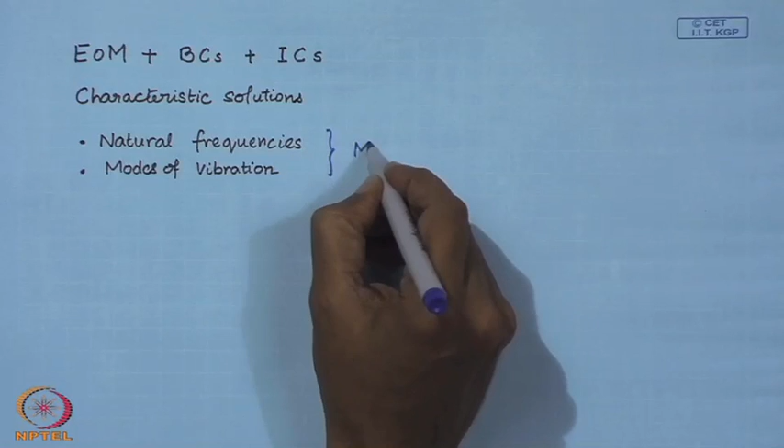So when we do modal analysis, what we are doing is actually searching for solutions of very special form. So if you recall the equation of motion of a string, suppose it is a fixed string of length L. So we have the equation of motion and the boundary conditions.

Now our field variable is this w(x,t). Now this is a general function of the spatial coordinate x and the temporal coordinate t.

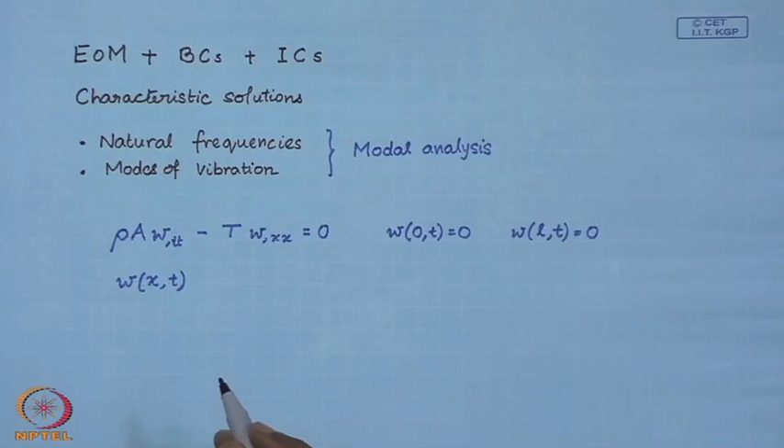Now, when we do modal analysis, we are searching for solutions which are of a very special form, which look like this, where this i is the square root of -1, omega is known as the circular frequency, and W is the amplitude function.

So we are searching for solutions of this very special structure, in which in a certain way the spatial function and the temporal function are somewhat separated. Now they look separated, but remember that we have introduced...

So now this solution is in the complex form. So this W may in general be a complex function. In that case, the solution is not strictly separated in space and time, but we will encounter such solutions later in this course. So for the time being, we introduce this complex solution structure, and we say that the actual solution, because our equation and the boundary conditions are all real...

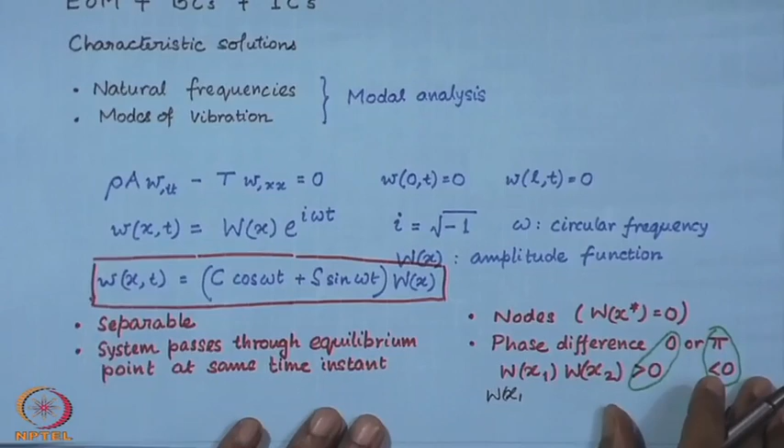There is another interesting property of the solution, that is the ratio of amplitudes at x1 and x2 that is independent of time. That is to say, this ratio. So, essentially this is independent of time, as we can see.

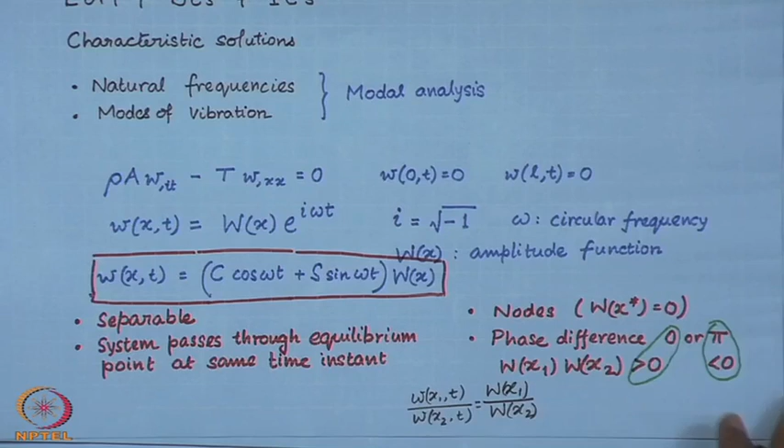So, we will start with this structure of the solution and see or try to find out the characteristic motion of the system. So, to do this we will start with the example of the uniform taut string.

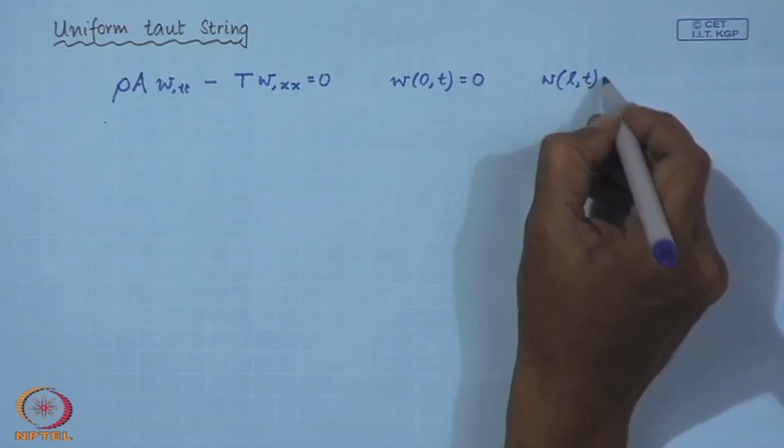So, the equation of motion and the boundary conditions look like this.

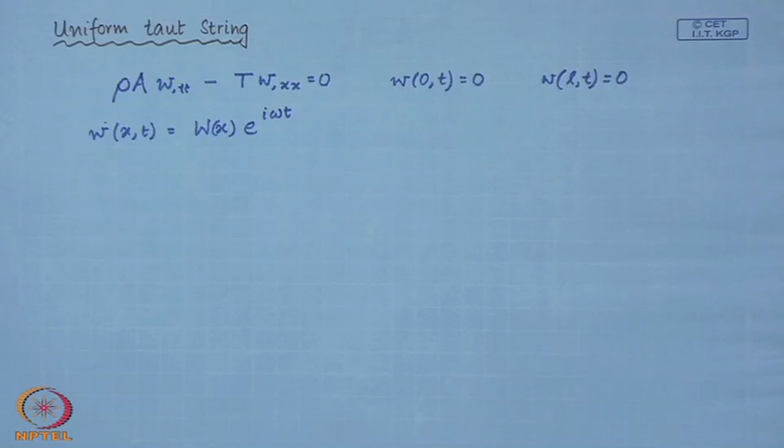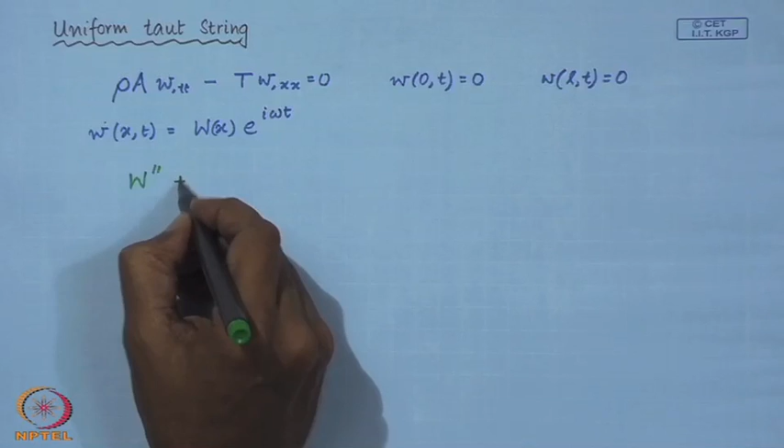Now, we are going to substitute this solution structure, and if you do that and with a little rearrangement you can easily see the equation reduces to this, because exponential i omega t will never be 0 for any time.

So, the remaining part, the coefficient of exponential i omega t, which is this, must be 0, and along with this we must have the conditions at x equal to 0 and x equal to L.

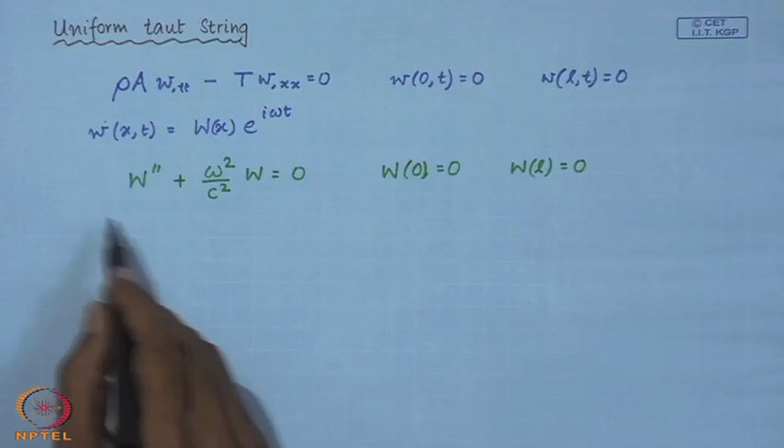Now, this differential equation is very familiar and the solution can be written directly. Now, this is the general form of solution of this differential equation. Along with this, now we have these boundary conditions at x equal to 0 and x equal to L.

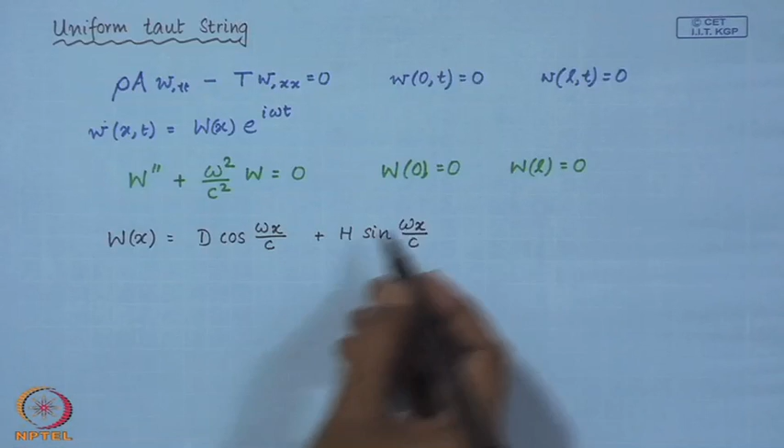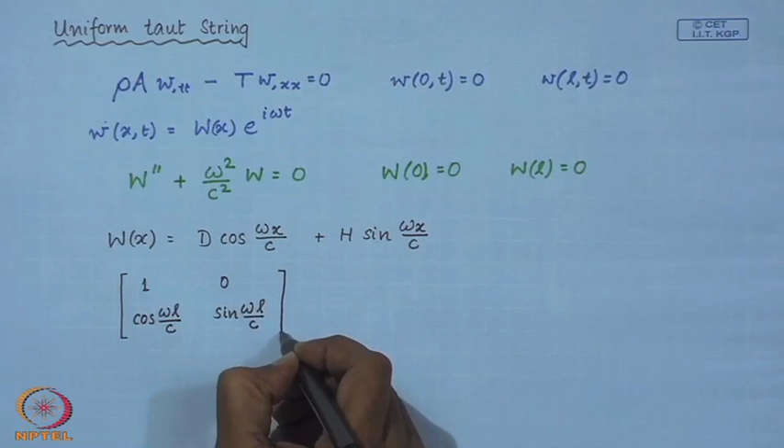So, we will substitute these in the boundary, this solution form in the boundary conditions, and we can rewrite the boundary conditions in this form.

Now, if you want to have non-trivial solutions of D and H, which is what we desire, then the determinant of this matrix must vanish. So, that implies

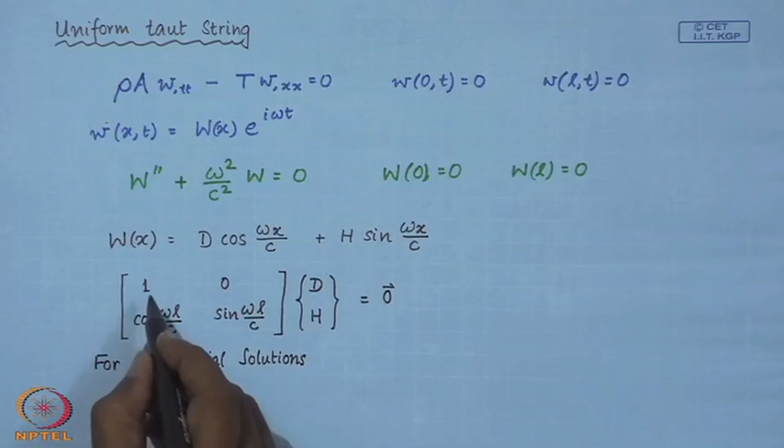So, determinant of this is nothing but sin omega L over C, and that must be 0.

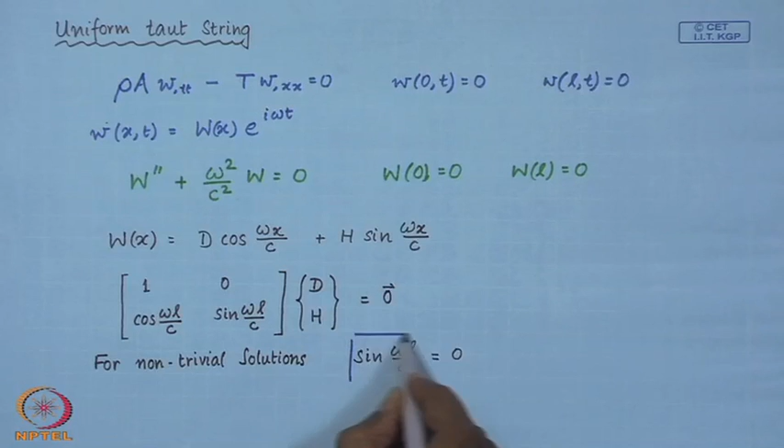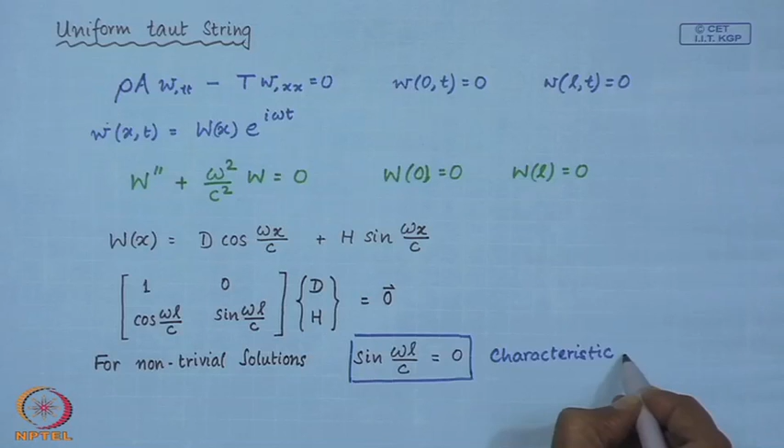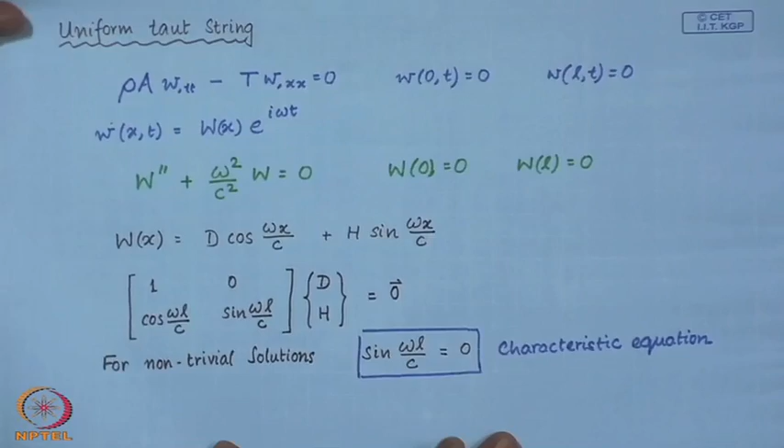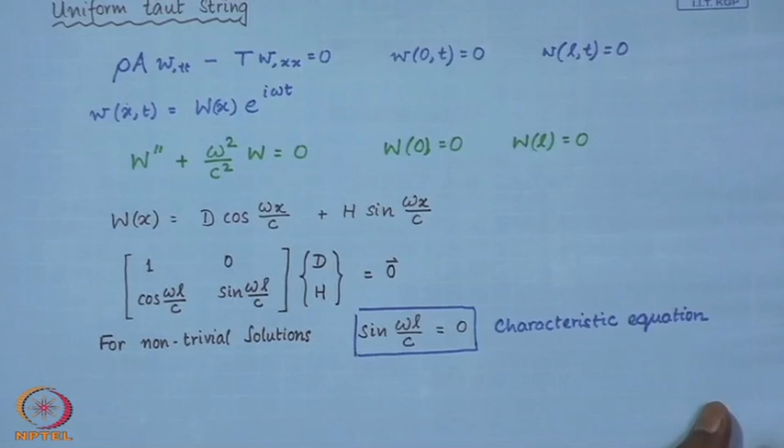This equation is known as the characteristic equation. Because it yields, this condition yields certain characteristic solutions or properties of the system, and they are the circular frequencies, which are also known as the natural frequencies, circular natural frequencies of the system.

So, from this condition we can immediately write that omega, now there are discrete solutions of this characteristic equations, but there are infinitely many of them. So, there are countably infinite many points at which this will be satisfied for special values of omega.

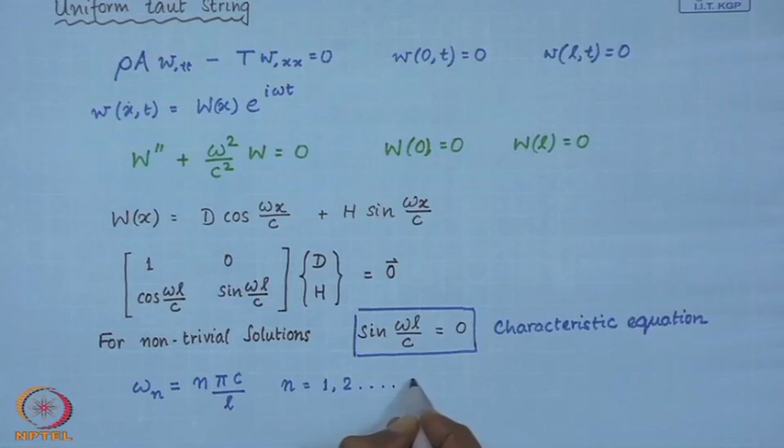So, we will put an index n and write this as, where n, this index n goes from 1 to infinity. So, there are countably infinitely many natural frequencies of a string, of a fixed string, which are given by these values.

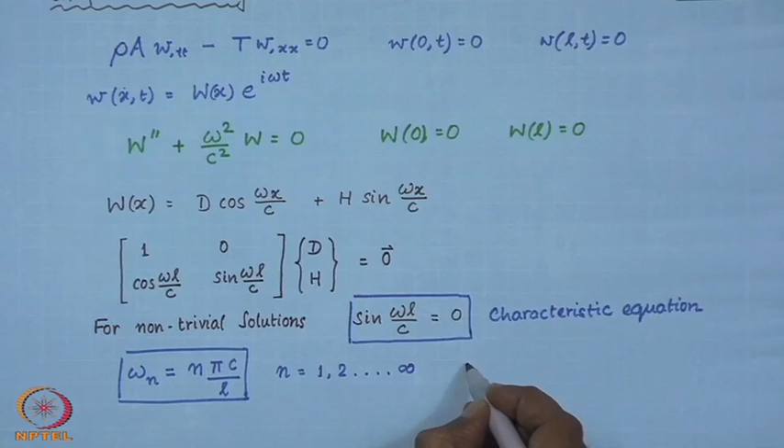They are called the circular natural frequency, also sometimes known as the characteristic frequencies.

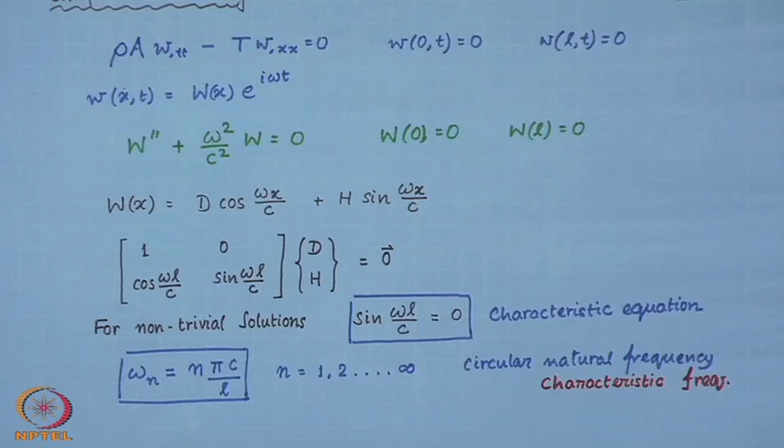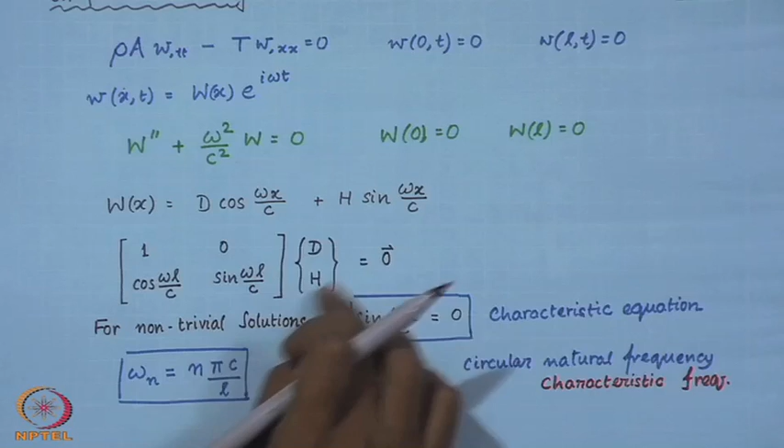Of the system. Now, once we find these special values of omega in this matrix for which we have non-trivial solutions, we can find those non-trivial solutions by finding the corresponding D and H values, which look like

So, if you substitute these values of omega n into the boundary conditions, it can be easily seen that the solutions are, or can be written in this form.

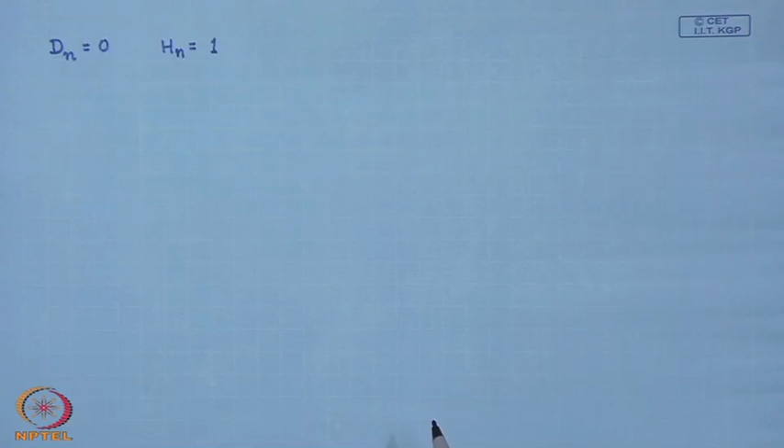So, anything proportional to this will be a solution, where n goes from... So, corresponding to each circular natural frequency, you have this vector which gives you the actual solution, which is obtained as

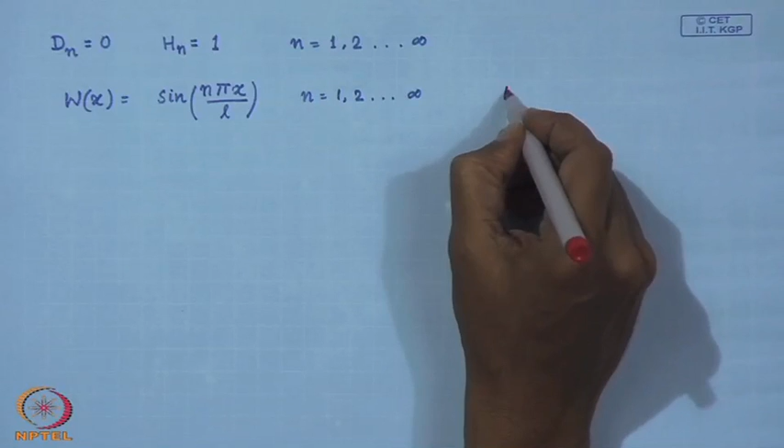These are called the modes of vibration, or they are actually the eigenfunctions, and again they correspond to the natural frequencies of the system. So, for every natural frequency there is an eigenfunction which defines or describes a mode of vibration.

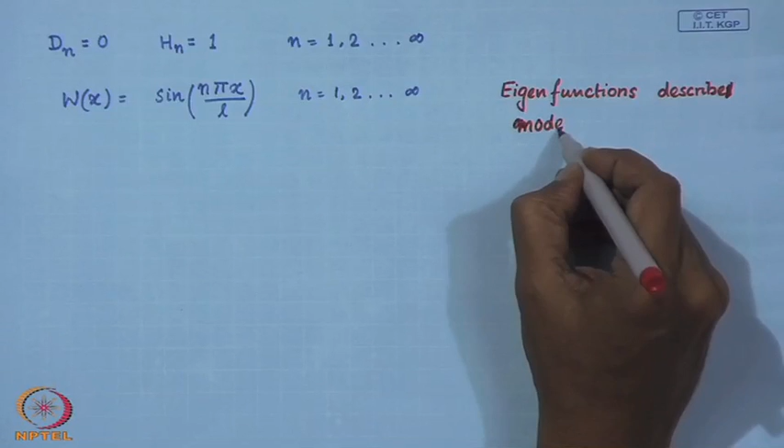So, the total solution now looks like this, and everywhere we have this index n. So, here also I must have this index n.

So, this is the solution for each n. I can have a solution, and since our system is linear, a superposition or a summation of this solution is also a solution. So, I can finally sum all these solutions and construct the most general solution of a vibrating string with fixed support.

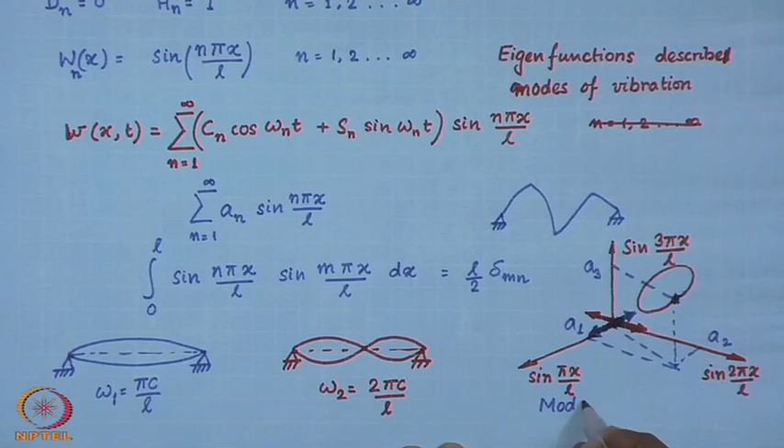This infinite dimensional space is sometimes called the modal space, or sometimes also called the configuration space of the string.

In this space, the configuration of a string at any time instant is represented by a point, and when it moves from one configuration to the other, it is nothing but the motion of this point in this space. We have seen that the elemental motion, or motion along these axes, represents the modal solution.

Now, I am going to demonstrate these solutions with a small experiment, but before that let me point out that as you can see in this solution there is no node within the domain of the string, whereas here there is one node.

Where the string remains fixed, this point is not moving out from the equilibrium position, whereas other points are vibrating. Here all points are vibrating in the same phase. So the string essentially moves through intermediate configurations like this, and then comes back and passes through the equilibrium point. At the equilibrium point the string becomes straight, then starts moving down and reaches this extreme, and repeats, starting afresh.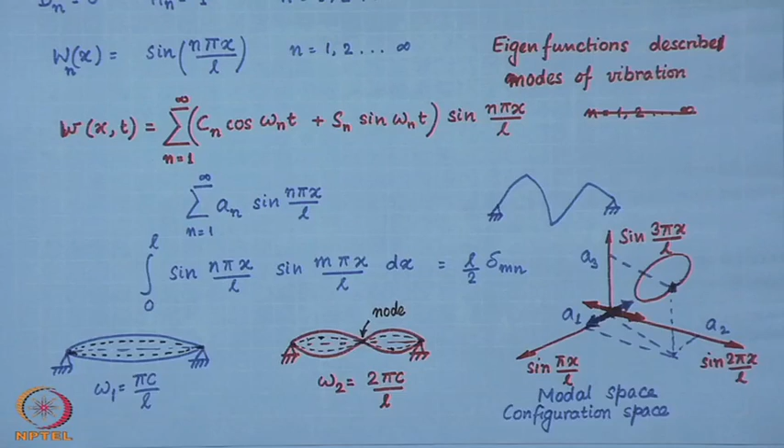So now I will demonstrate these modes using a small experiment. Here I have a string which I have made taut by pulling, and here there is an exciter, which is nothing but a simple electric shaver.

Now, as I pluck the string, you see the motion ceases after some time. This is expected since all real systems have internal damping, but in our model that we have considered till now we do not have damping. So to cancel the effect of damping I must have an exciter which pumps the same amount of energy that is being dissipated due to the internal damping in the string.

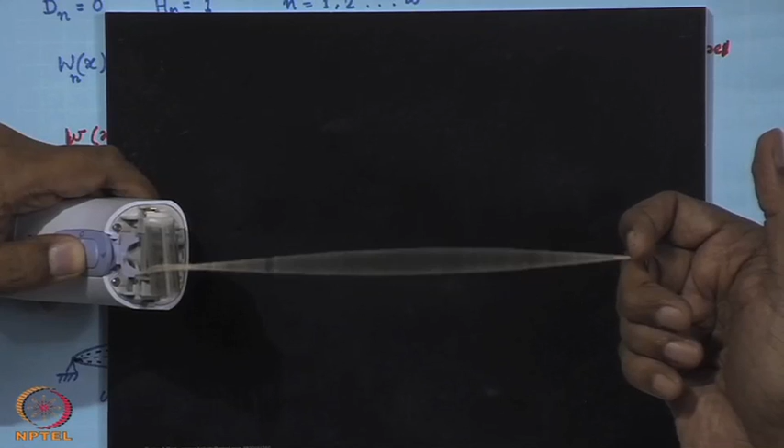Now let us see. So this is the first mode of vibration of the string. This is how it looks like when it is vibrating in the first mode.

Now let me try the second mode. So this is the second mode of vibration of the string. I may also try the third mode, which may not be visible very clearly because the amplitudes are so small. But the second mode is quite clear, and the first mode as well.

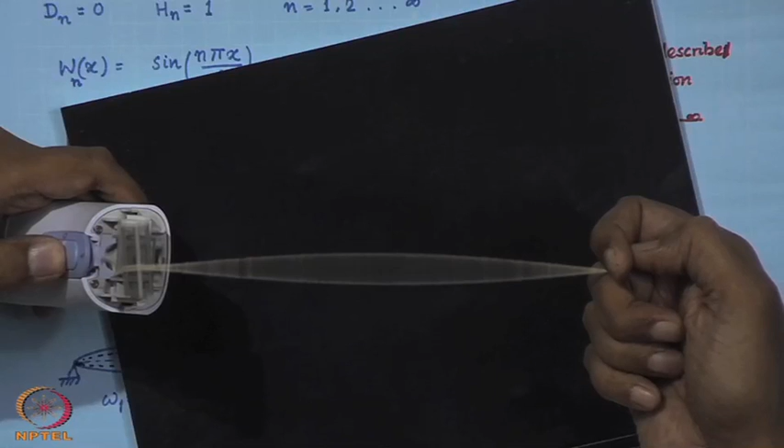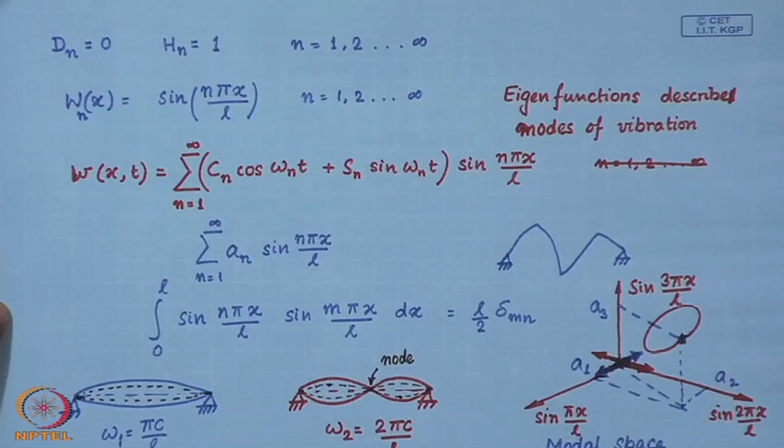So this is what we have observed. We have seen the first two modes quite clearly; the third mode, because the amplitudes are so small, has been less visible, and so on for the higher modes.

But whenever I pluck a string, I actually excite a number of these modes. So the motion of the string, if I pluck it at an arbitrary point, I am actually exciting a number of these modes. So the solution is more complicated, but I can, by special means, excite only these individual modes, and we have seen that in a demonstration.

The next example that we are going to look at is that of a uniform hanging chain. We have derived the equation of motion of a uniform hanging chain previously, and it looks like this.

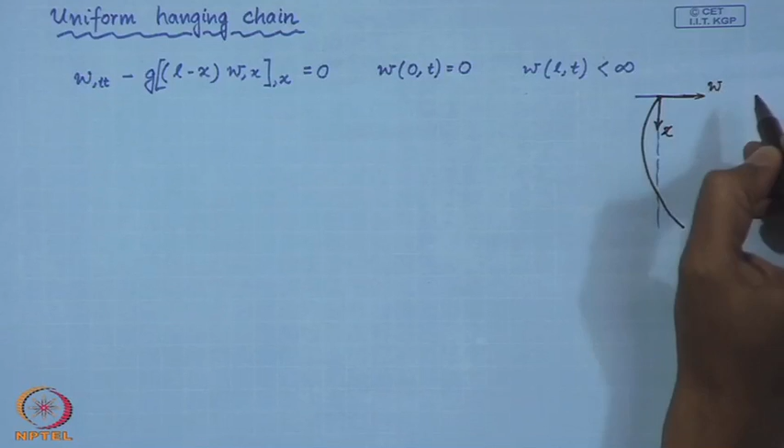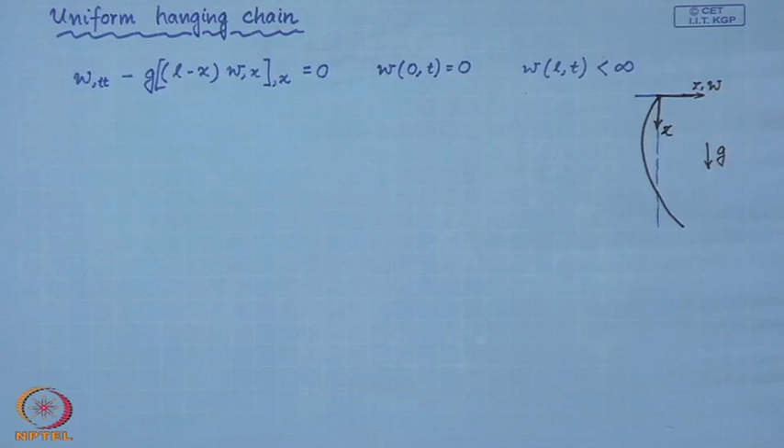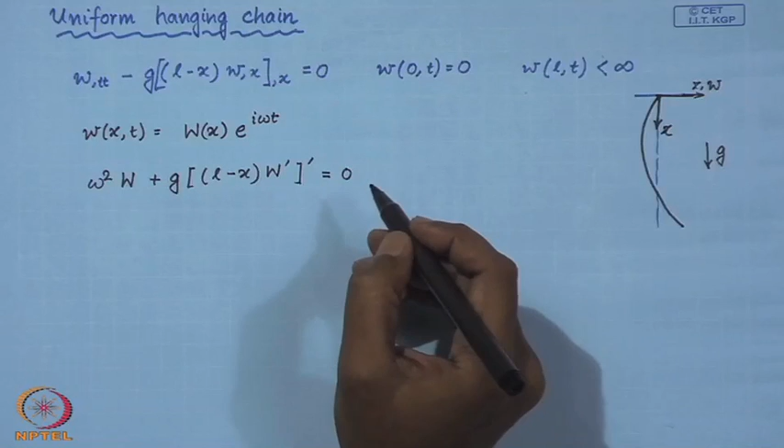Now, once again we are going to attempt a solution with this structure, and we obtain this, with the boundary conditions.

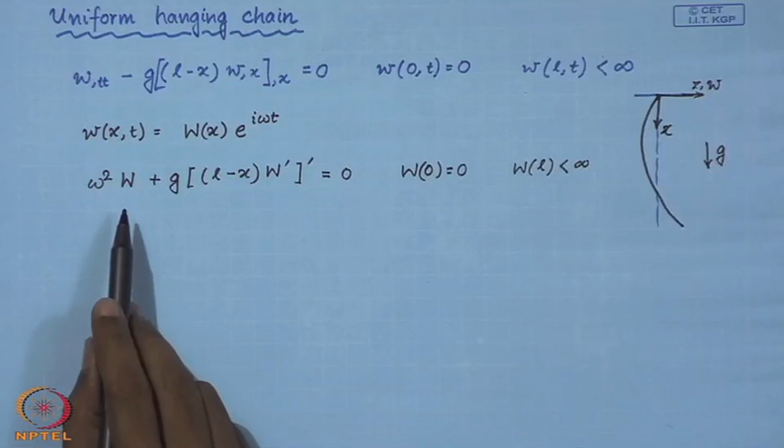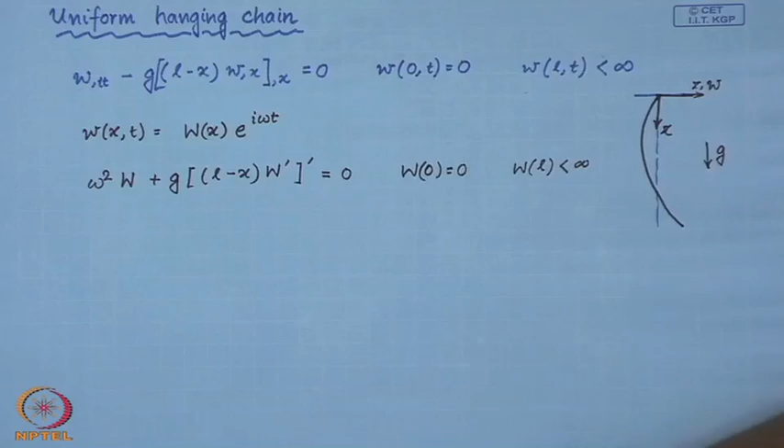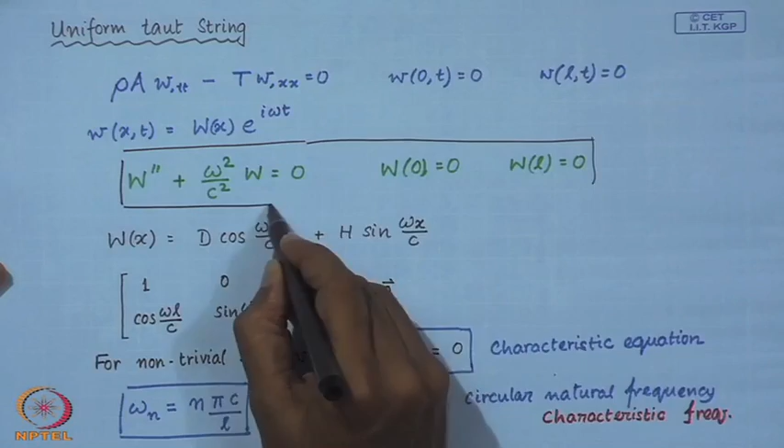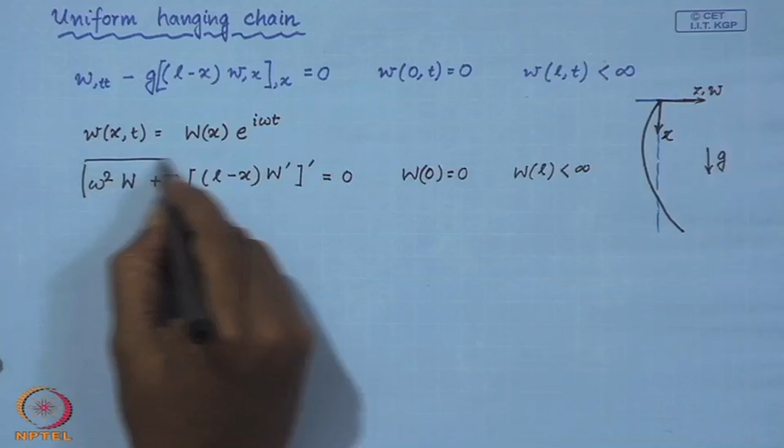Now, in the case of a uniform taut string, we obtained the equation previously. After substituting the solution structure, we obtained a differential equation and boundary conditions. Here again we have obtained a differential equation and boundary conditions.

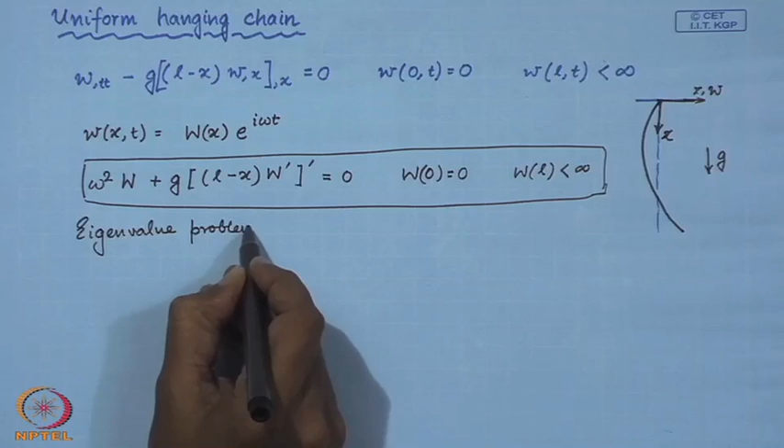This problem is known as the eigenvalue problem. So in the case of a string, this was our eigenvalue problem.

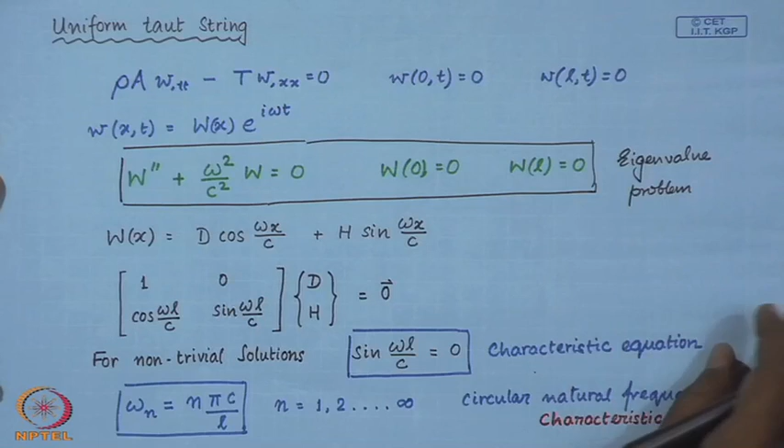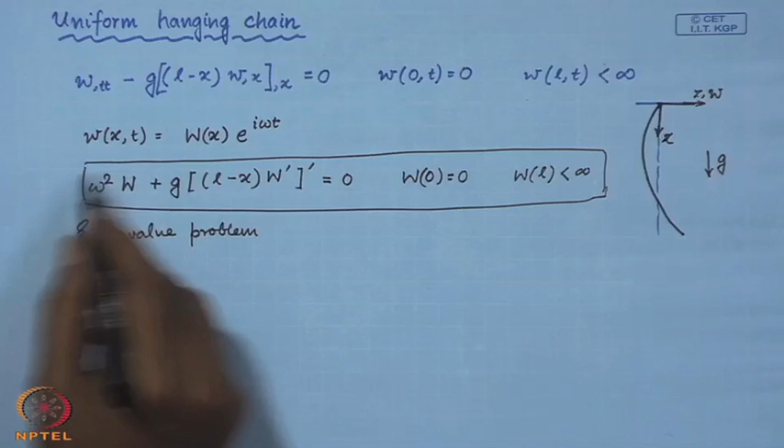Now, this structure of equation looks tantalizingly familiar, because we have studied equations of this structure when we discussed Sturm-Liouville problems in mathematics.

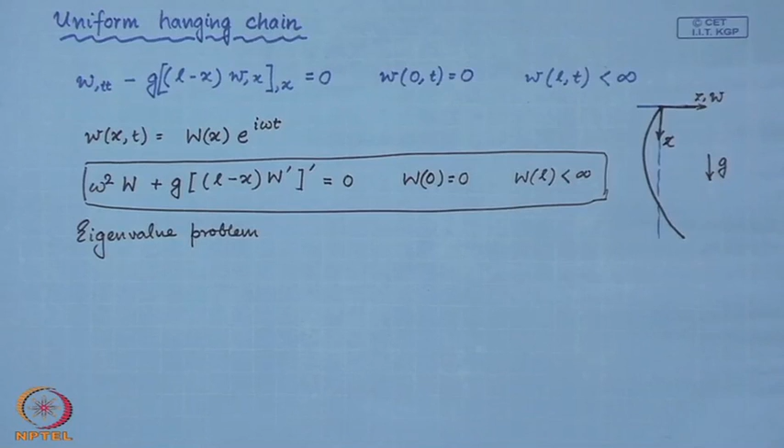Now, to convert this, because this particular structure is very special, we can convert this into a more familiar form by using transformation of the independent variable x. So, let us consider a variable s which is a function of x.

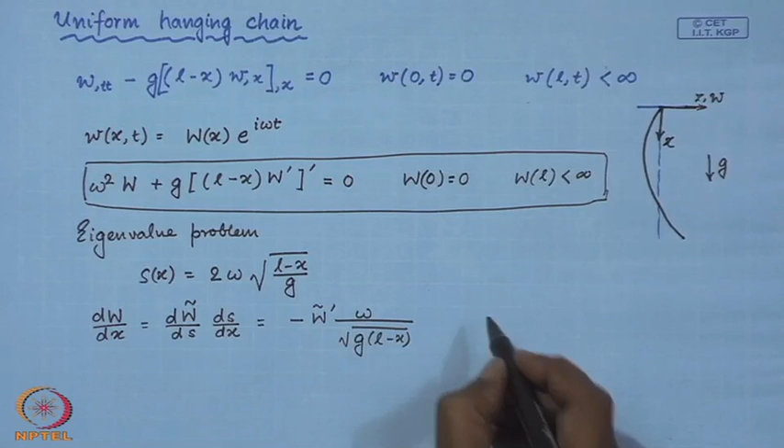If you use this new variable s, then you can replace, which you can check very easily, where w tilde is a function of this new variable s, and similarly you can work out the higher derivative.

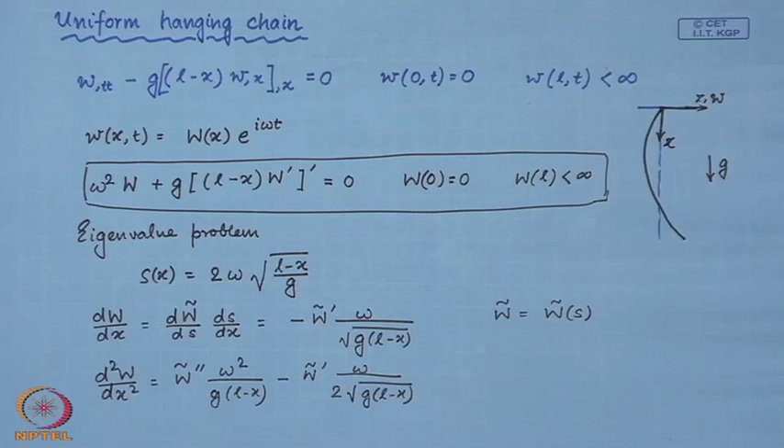Now, having done this, if you substitute back in the equation and convert this equation in terms of s, then what you obtain is, with the boundary conditions, this can be checked very easily.

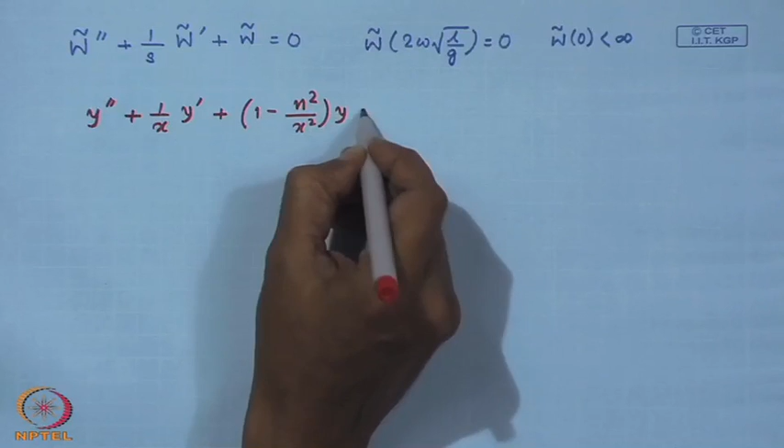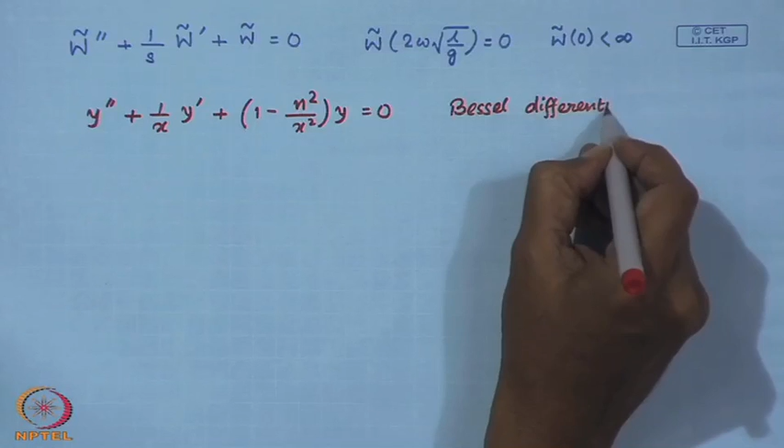Now, this is a very familiar equation which is the Bessel differential equation. So, this equation is the Bessel differential equation, and if in this equation you put n as 0, then it reduces to this differential equation.

And the solution of the Bessel differential equation with n equal to 0, which is the solution for our w tilde, where j 0 and y 0 are known as the 0th order Bessel function of the first and second kinds respectively.

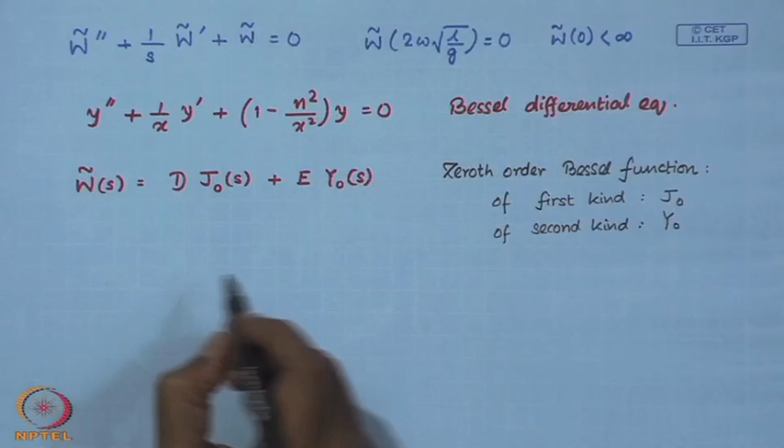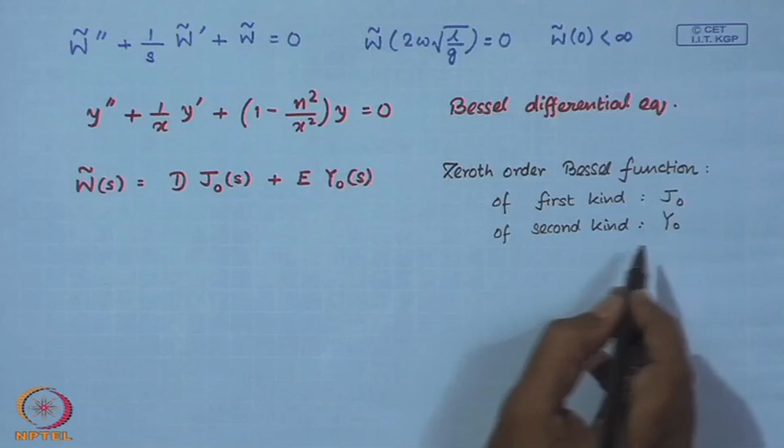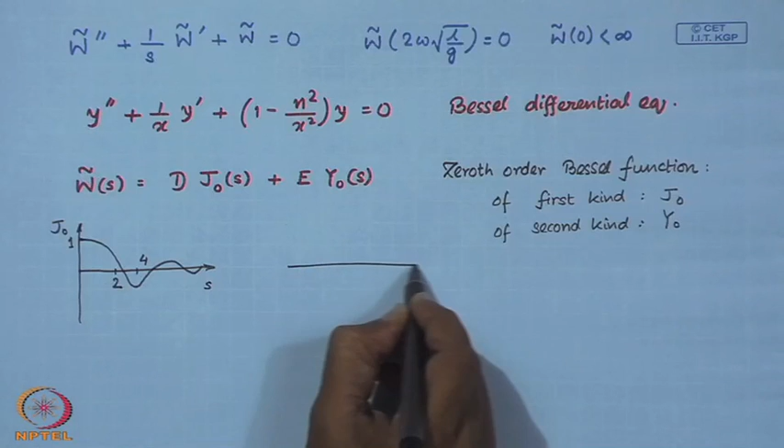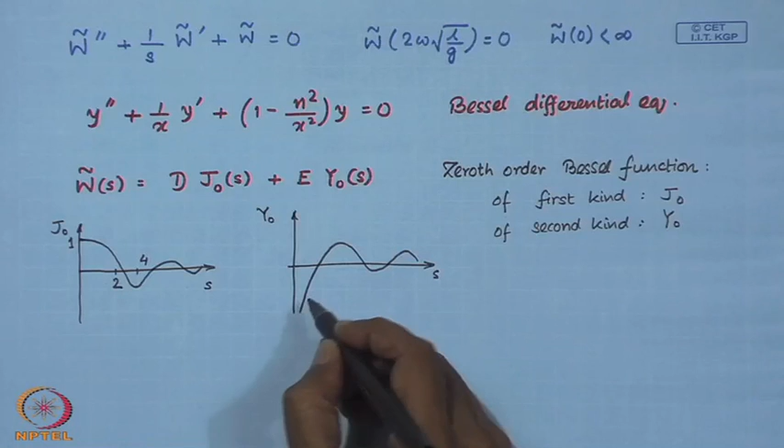Now, if you look at these Bessel's functions of 0th order, you will find that the second kind has a logarithmic singularity at s equal to 0. So, if I make an approximate plot of j 0, at s equal to 0, y is minus infinity.

So, this will violate this boundary condition, which is the boundary condition at the free end. So, finiteness of the solution at the free end forces us to select E as 0. So, E must be 0.

Which can be written. So I can write this down in terms of my original variable x, but before I do that, let me look at the boundary condition. So we know that this implies.

This must be 0. Now, you can see from this figure there are discrete points, but infinitely many, at which this function j 0 is 0. So these countably infinitely many solutions of this will give us the natural frequency, circular natural frequency of the system.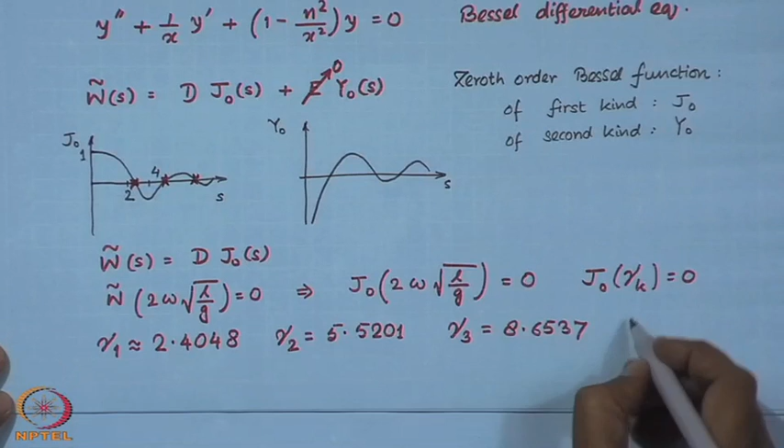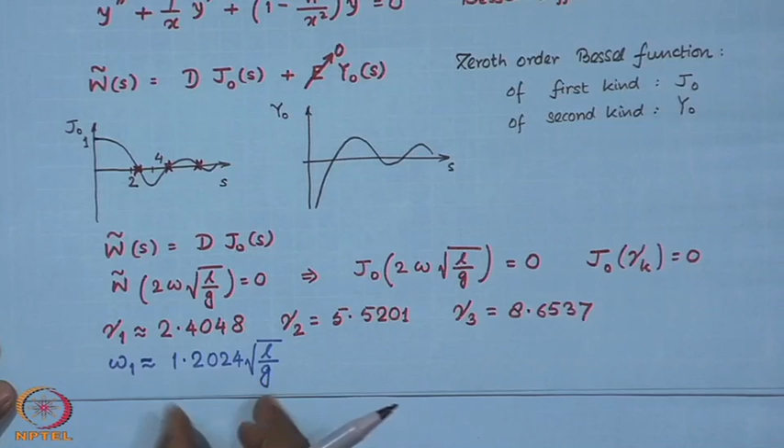And from these values of gamma k, you can find out, for example, you can easily write omega 1 as 1.2024 under root L over G. So you can see that compared to a mathematical pendulum, this is 1.2 times higher.

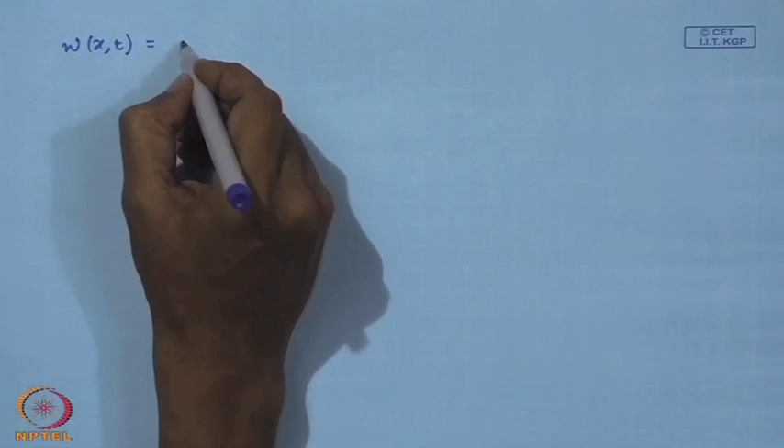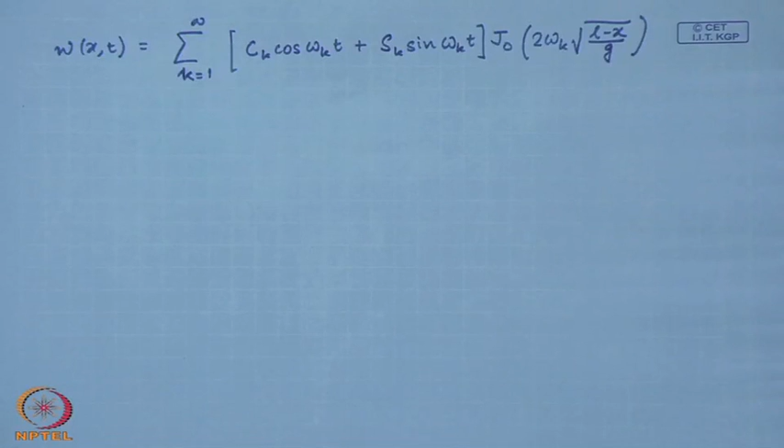Now, finally, once you have this, you can write the general solution once again using superposition. Where, so these represent the modes, these are the eigenfunctions, and the modes of vibration of a uniform hanging string are defined by these eigenfunctions.

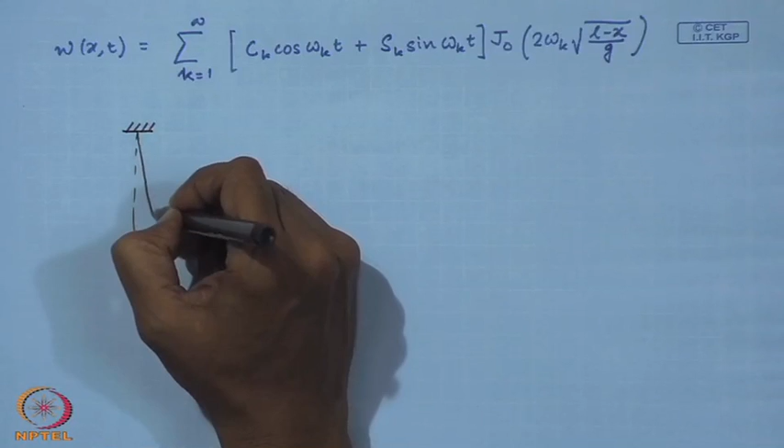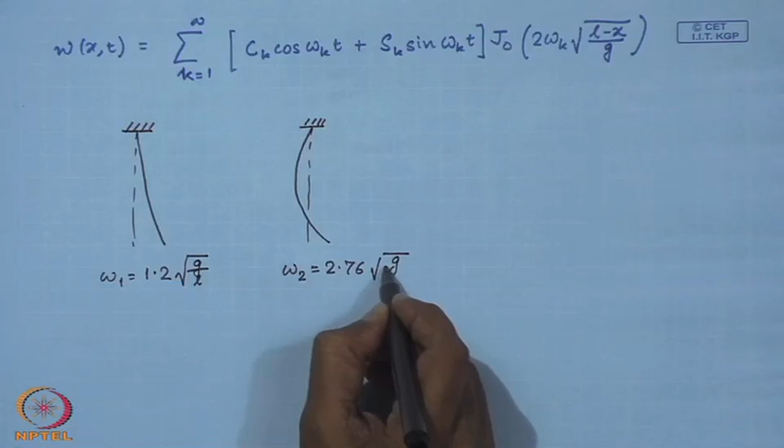So this is the first mode. This is the second mode. And this represents the third mode.

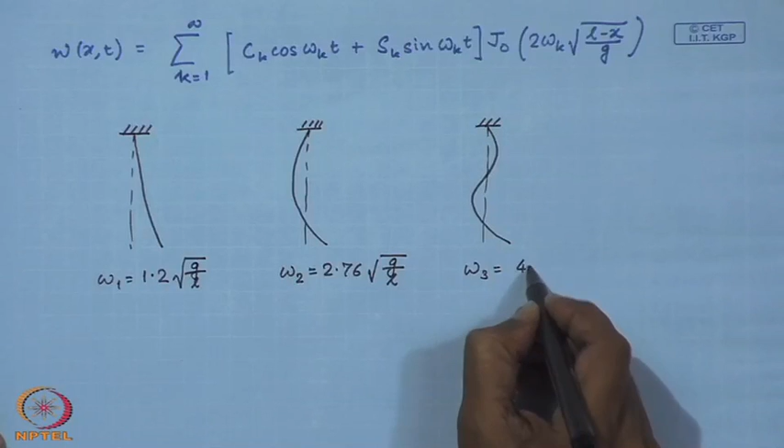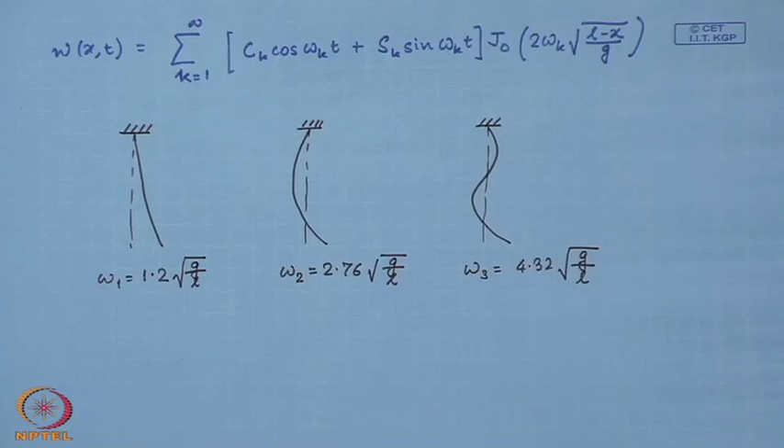So, in this lecture what we have studied is the modal analysis of continuous systems. We started off with the modal analysis of a taut string, then we looked at the properties of these modal solutions, and finally we also looked at the example of a uniform hanging chain. So with this we come to an end of this lecture.